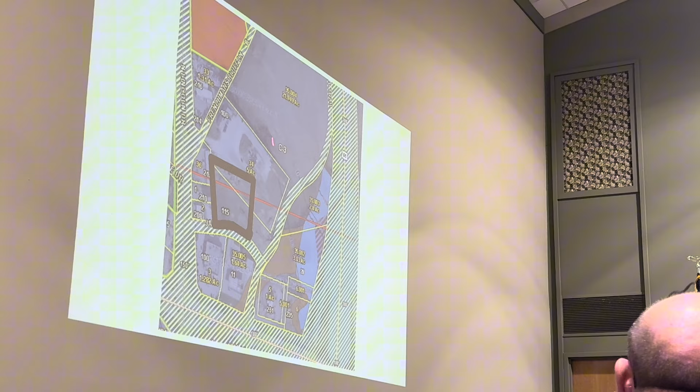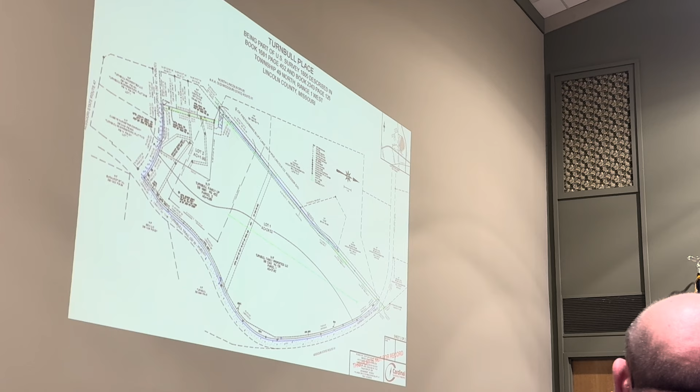Okay? It's hard to read this, and I'll try to blow it up, it's real blurry, it's hard to see. The parking requirements, they have to have at least 59. They have 70 total, including 4 handicap spaces, okay? They've got the required

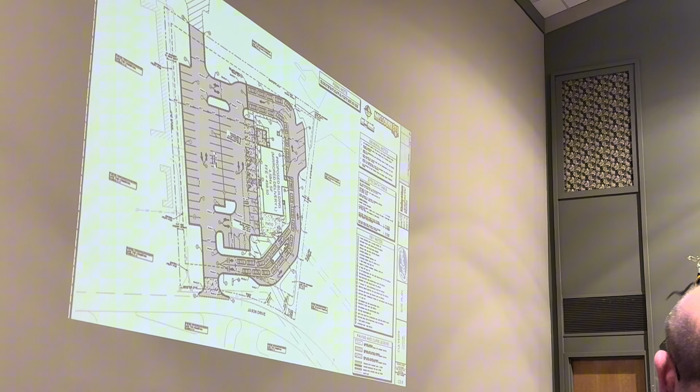This is going to be a community or regional detention basin. Let me back up here. That top corner and that bottom corner are small detention basins, okay? Then by pipes, it comes through here, it's hard to see in this, right here. There's a big box culvert, and you can see the pipes coming over. That goes into this drainage area.

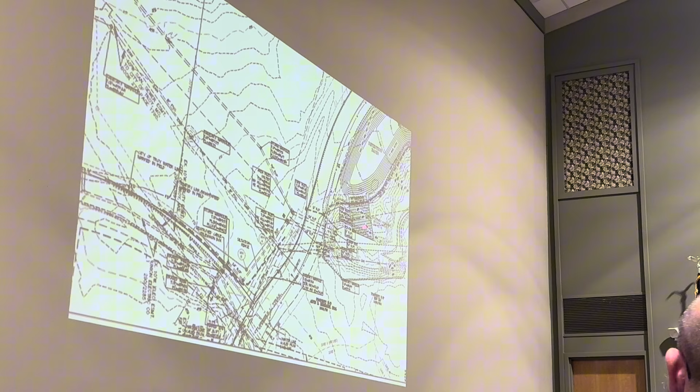Is that existing right now, or is it gonna be new? Huh? Is that existing, or is it gonna be new? New, okay, there's nothing there. That box culvert's there now. The box culvert is there, but the detention basin's not. Okay, I knew the box culvert was there, but I didn't know if the basin was there.

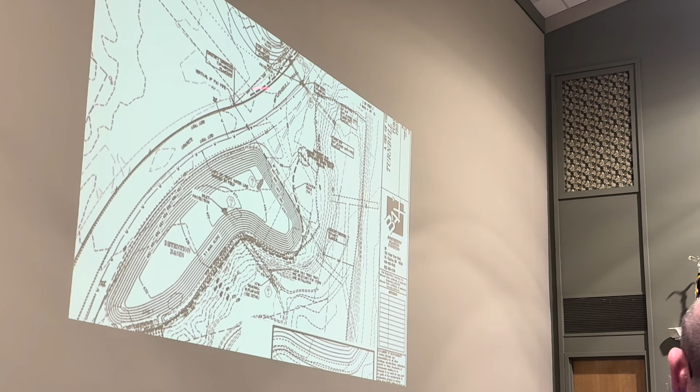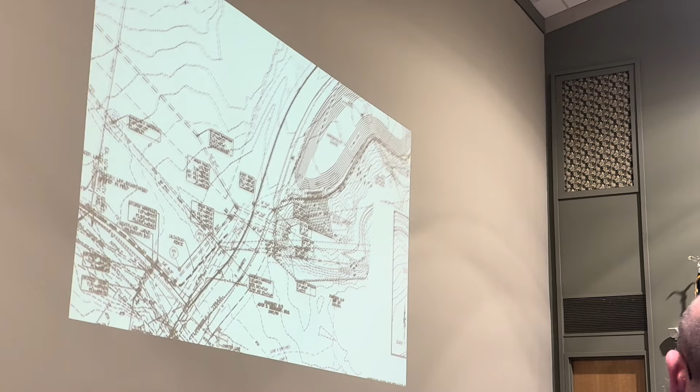Right. A rule of thumb, or the safe way to say it, you can't increase the runoff of the property, right? Y'all familiar with that term? They took a reading at this area where it leaves this property and goes under 61 across, okay? I'm just bringing it to your attention, it's probably too much information, but I want you all to understand this. To keep it at the same level or reduce it, there's so much going into that ditch, and the rest of it's being picked up by the detention. So it does not increase the runoff. You follow me so far?

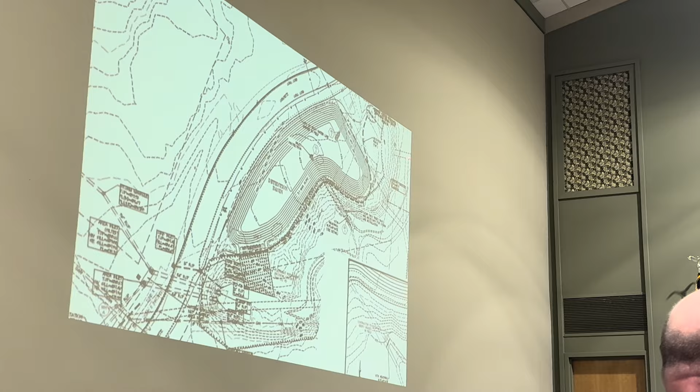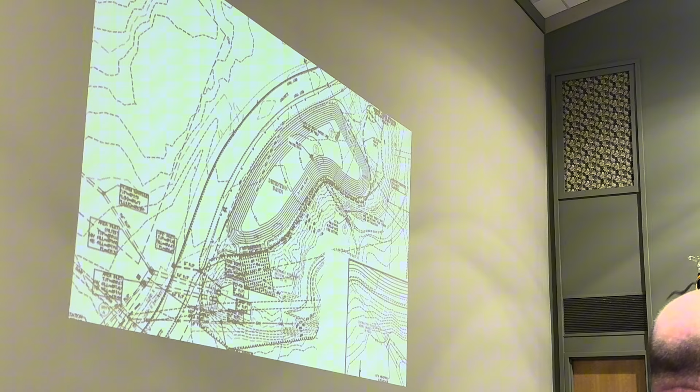Yep, keep it equal. Right, so that's why those two pipes, because as soon as we see it, we question it. Those pipes don't go technically into that detention basin. Like, whoa, we got an issue. And we have an engineer that can explain it engineering-wise, but typically you guys don't look at the infrastructure. No. But I'm letting you know what's going on. I rely on you. So that's why it's like that. That's fine.

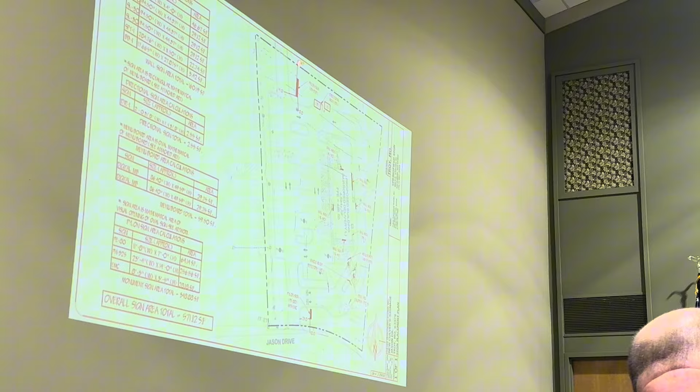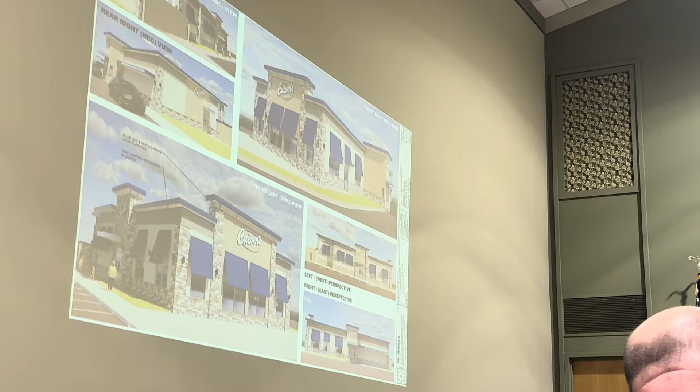Next slide. This is the site plan. It shows all their little signs on the buildings or order menus. There's a pylon sign here, a small one, and there's a tall one up here, which would be the north side of the site plan. The short pylon looks like this, it's 25 feet tall. The tall one's this way, and it's 100 foot tall, and that's what it's gonna look like. Awesome. And that's it.

Should I go ahead and say item 2 too, or should we vote on item 1 first? Do one and then two. Okay. All right, anybody else have any questions for the people that are here? Obviously, the engineer's here too. You guys got anything you wanna add? Okay, didn't mean to put you on the spot, but sometimes I get talking. No, thank you for summarizing. Okay. All right. Any discussion?

Okay. I'll entertain a motion to approve item 1 of PZ-26-0001 then. So made. How about you take the second? All right, that's gonna be a roll call vote on that. Kevin Bishop, yes. Harold Warner, Vicky Cool, yes. Wayland Martin, Margaret Avesmeyer, yes. Deanne Abelak, yes. Deborah Thurman, yes. Dan Culver, yes.

All right, item 2, Culver Horn Associates Incorporated, the applicant requests approval of a commercial site plan and conditional use permit to allow a drive-through window for a proposed Culver's restaurant to be located at 115 Jason Drive. Is that just a technicality for the drive-through on the C3? Any drive-through has to have a conditional use. Gotcha, that's what I thought. All right. Any discussion on that?

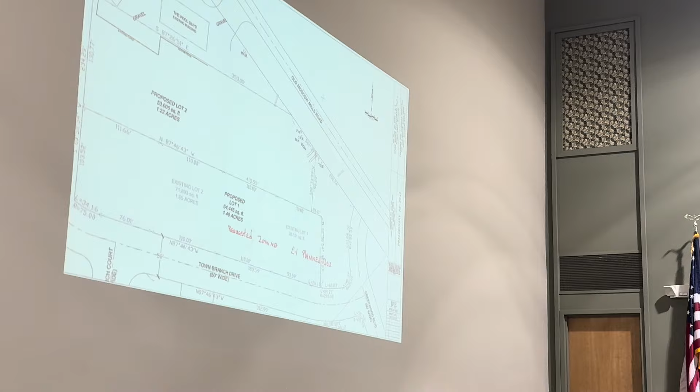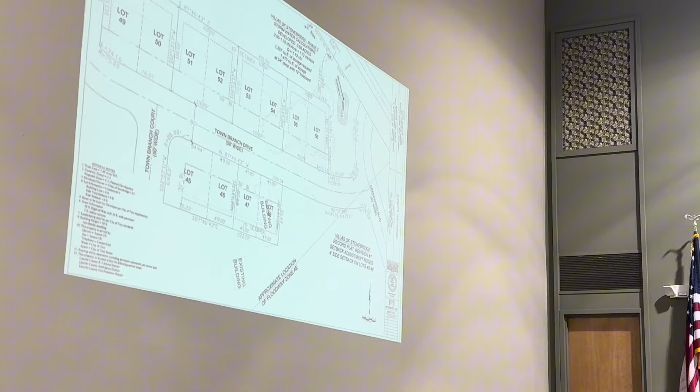This is the pool guys, I'm sorry. They're talking right now possibly a restaurant, a couple of small businesses. They'll have their own detention basin. Cannons, this is what they wanna do with their property. These two are existing lots. They wanna add 2 more on this side and those lots there to match up with what's there with the Stonebridge Villas. Is that gonna be part of your villas, Monty? Okay. That's it. Okay. All right, anybody have any questions for item 1 on that?

All right, if not, I'll entertain a motion to approve item 1 on PZ-25-0016. So moved. Is there a second? Second. Thank you. All right, roll call vote? Kevin Bishop, yes. Harold Harder, Vicky Cool, yes. Waylon Martin, Margaret Epstein, yes. Deanne Ayla, yes. Deborah Thurman, yes. Dan Cobb, yes.

All right, item 2 on that is Monty Cannon on behalf of Cannon Builders and Eddie Edmiston request approval of a rezoning request for the proposed lot 1 of Stonebridge Professional Plat 1 from C3 Highway Commercial District to C1 PD Central Business District with a planned development overlay and approval of the site plans for the proposed lots 1 and 2 of Stonebridge Professional Plat 1. And that basically is just, pool guys get the north one and Monty's gonna go on the south. Any more discussion on that? Any questions or concerns?

If not, entertain a motion for item 2. So made. I second. Roll call, please. Kevin Bishop, yes. Harold Harder, Vicky Cool, yes. Waylon Martin, Margaret Epstein, yes. Deanne Ayla, yes. Deborah Thurman, Dan Cobb, yes. All right, motion carries. Again, whoever's here for that, Monty, just Alderman meeting on the 16th, just to double check.

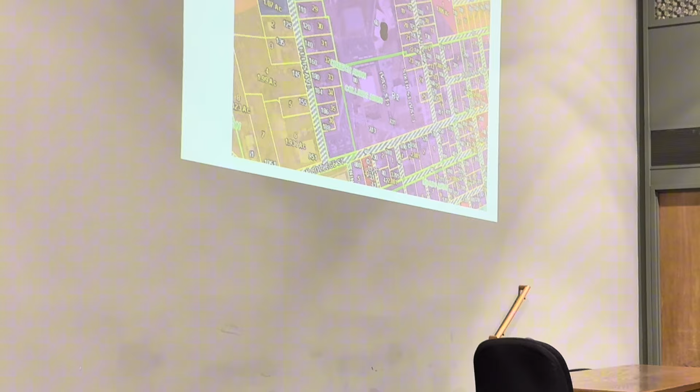All right, item C is PZ-26-0004. Bryce Gregory, on behalf of Lincoln County R3 School District, is requesting approval of a site plan for an addition on the construction trades building located at 60 Clotsfield Drive. Come on up, gentlemen. Good evening, Board. We're here on behalf of Lincoln County R3 School District, Bryce Gregory, to propose an addition to the 60 Clotsfield. My name is Brett Lovell, Austin Barton, and Ben Gifford, sorry. Don't be shy, we won't bite.

You can see our existing buildings, the left there, the hashed out part is what we want to do for an addition. We have wood shop in there. I don't know if you guys have seen the plans. We haven't seen the plans, no. Would you like to see them? So this is just tied to the existing building, tying in the back of the existing building. We started out pretty small, and we've added 3 teachers in the last 2 years. So we went from like

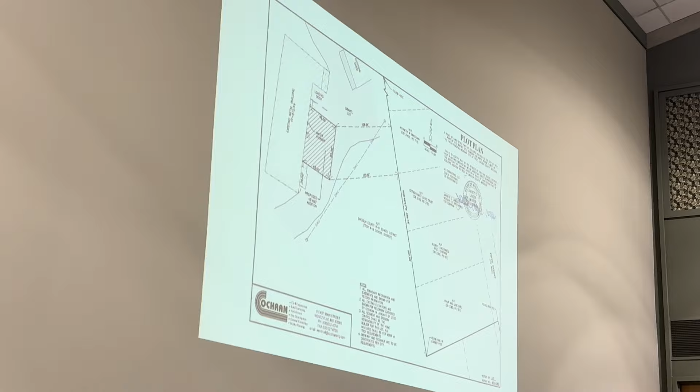This is just in our construction program. Okay, that's really cool. So we're trying to get welding in there and some other things. How big is it gonna be? 45 by 60, it's pretty big. Inside of that addition, we'll have like a plumbing wall, electrical wall, that way the kids can get their hands on before we go to our job site to work on our tech house. They kind of get that real world experience while they're under our roof at our shop.

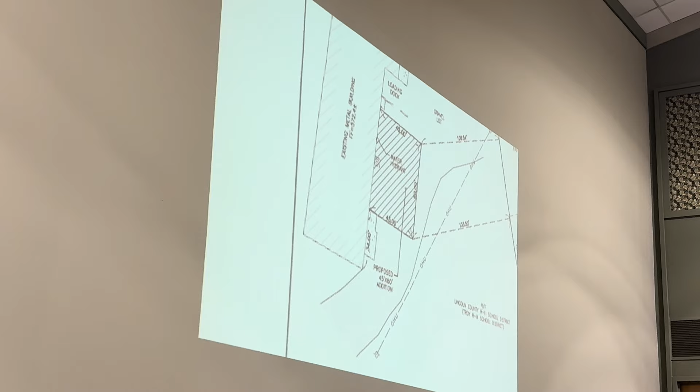Now, are you guys actually going on site and building houses with these kids now? I know that Pike Tech did that. Right now, we're building between Troy South Elementary and Troy Middle School. Yeah, I know what you're talking about, because you had like 4 lots there, at Crooked Creek or whatever it was. That's cool. It's very good for the kids. I'm glad they're interested in doing something like that. We need skilled labor people, that's for sure.

Which building is this being added to? I guess it would be to the east of the tennis courts, and south of New Horizons building, there's a building that I think used to be maintenance shop, which we've turned into construction classroom and wood shop classroom, and now we're outgrowing our existing building. We're looking for additional areas.

That's really good. So the building now, is it being used for your construction trade classes now? Yeah. I know it used to be the maintenance building at one time, wasn't it? It was, we finished out, put classrooms in, metal the inside. Just kick the maintenance guys out, just say go away. Well, up the top left hand corner, that's where they're at.

All right, anybody have any questions for these gentlemen? Any more questions? All right, if not, entertain a motion for PZ-26-0004.

Is there a second? All right, roll call vote. Kevin Bishop, yes. Harold Porter. Vicky Poole, yes. Wayland Martin. Margaret Evans, yes. Ian Edelot, yes. Deborah Thurman, yes. Dan Culver, yes. Thank you, gentlemen. Thank you. And again, you might check with the Aldermen meeting on the 16th. Okay? All right, thank you.

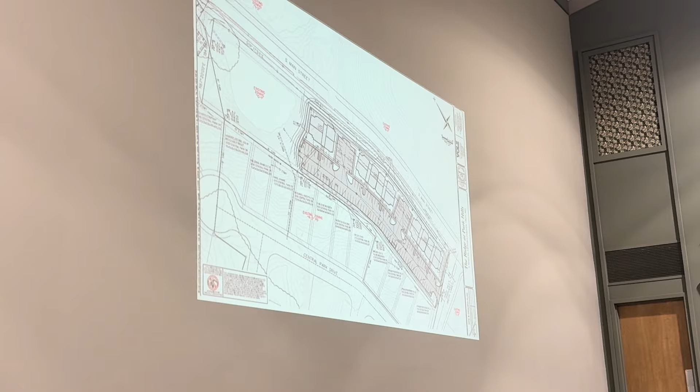I think you're pretty familiar with this site. The site is currently zoned C1, and what we're proposing is 60 multifamily units in 3 different buildings. So 60 units in 3 buildings. And I just want to say that multifamily is an allowed use in the C1, and we're not seeking rezoning, we're not seeking a CUP, we're not seeking any variances. So we're complying with the ordinances, the zoning and the subdivision ordinance with this plan.

So the site is 3.79 acres, and it's basically about 185 feet by 900 feet, so it's a long site. And on the south side, which is by the road there, it falls about 30 feet to the north. And the very end of it is where the detention basin is. It's actually an existing detention basin that's already built and is sized and will properly detain the water for this site, so there's nothing to do there. So again, there's 3 buildings. The one on the right, which would be the south end.

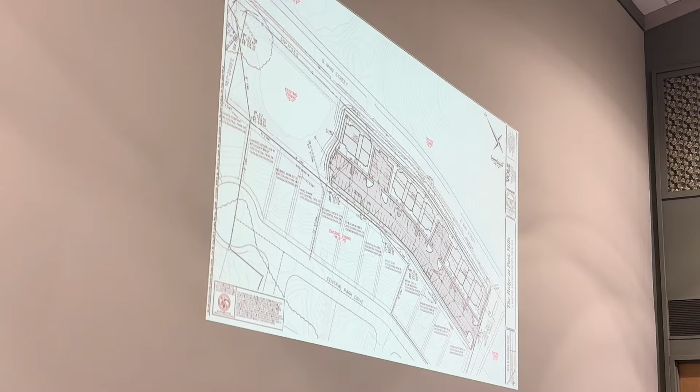Excuse me? Oh, sure. Now, your wife has flu, is that what I heard? Huh? Your wife has the flu, is that what I heard? No. Okay. Administrative assistant. Okay.

So this building right here is 24 units, the second building is 24 units, and this has 12 units. And again, it falls about 30 feet from right here to right here. The parking code that the city has actually requires 2 parking spaces per unit, so we have 120 parking spaces to match the 60 units. Parking spaces, the requirement is 10 by 20, which is actually the largest I've seen, with 5 handicap, and the drive has to be 25 feet, and this site plan meets all of that, so we have all of that in place.

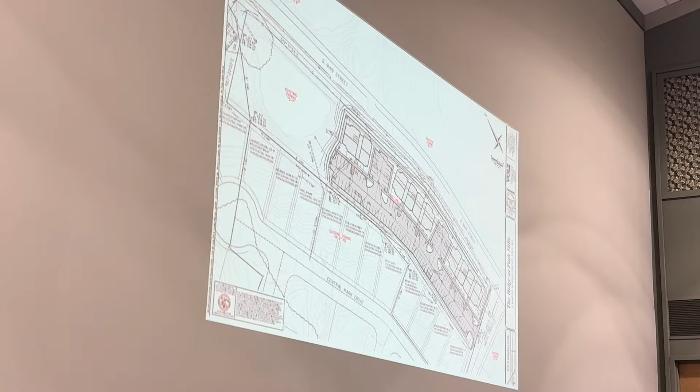Your parking and stuff. Sure, yeah, so the parking is, I think, right there. So if you go back to the site plan for me real quick, the parking lot does have lights, and there's a few light standards here, and they're gonna be diffused, so it all goes into the site and doesn't spill over here. And then we propose landscaping along this buffer right here to screen these people, and these are the green giants, which I actually have in my backyard, and they grow pretty fast and pretty tall, so they create a good screen. And with that, I just wanna say again that we think the site plan meets the C1 zoning code, and we're hoping that you approve it, and we're here to answer your questions.

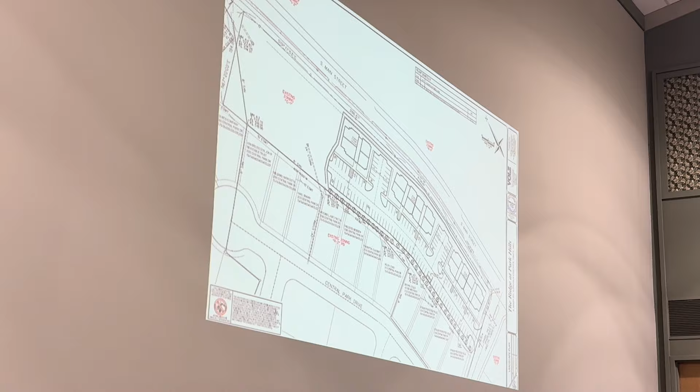You talked about the number of parking spaces. Does that allow for any guest parking? So the code is 2 spaces per unit, and that is factored into your code. Most apartment units that I do are actually like 1.8 or 1.5, so 2 should be plenty to supply these, because a lot of these are gonna be one-bedroom apartments. So 2 is generally used, and that will also provide enough parking for guests. Our parking regulation only requires 2, period. Okay. I'm just telling you, being realistic, that most apartments have 2 vehicles on their own.

Good. So most codes, though, 2 is actually on the high end of what is typical for an apartment. Well, you can't park a vehicle and a half. So generally, the requirements for most municipalities are between 1.5 and 1.8, so yours is higher. And this meets the code, and there should be plenty of parking based on your ordinance, which I'm telling you is higher than what's typical. So, you might not believe me, but it actually is.

I'm not saying I don't believe you, but I'm just saying if I were writing code, it would be more, or else there would be an allotted guest parking lot, however you want to word it. Sure. But I've lived in enough apartment buildings, I know there aren't enough parking spaces for everybody to be home at the same time. Right.

The retention basin? Sure, yeah. If it was already put in, how do you factor in that much more water going into it? Wouldn't it have to be made larger? Well, this basin was actually already sized with this being a developed piece of property. So when it was designed and built, which I didn't do, but we're going to actually have to provide those calculations, which we've done already, it already had this site in mind as being a developed site.

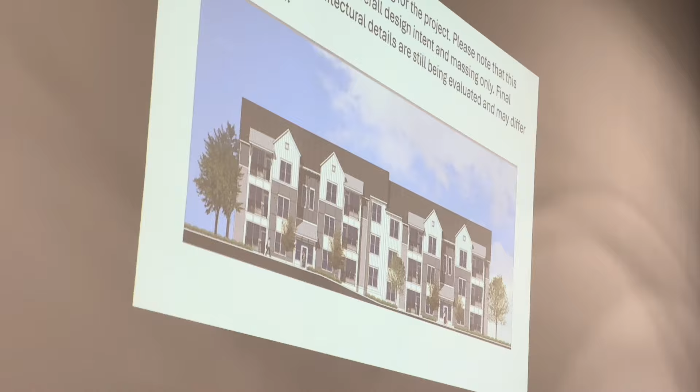Okay. I would also like to know who's going to manage these apartments. That's a question for these gentlemen right here. Yeah, because if you don't have good management, they'll be run down in no time. Sure. Well, honestly, here's the thing. I would think if they're going to spend the money, and the units look pretty nice, they're going to be pretty diligent about who they rent them to. They're going to go through criteria. Look at our houses right now, a year or two after. I understand your emotional plight, but we're just an advisory board to make sure they're conforming with the zoning. And right now, they're conforming with the zoning.

How is this going to affect our house values? Honestly, a lot of people say that. I'm in the business and I have not seen a stigma yet, unless it's a complete slumlord, that would change the value of your home. It has to be established to see whether it's going to make your values go down. You can hypothetically think it might, but until it's established and you see a problem with it, like a police presence or whatever it might be, then that'll stigmatize it. But until it's done and established, it's kind of hard to tell. Any other questions or concerns?

Yes, ma'am. I just wanted to clarify, you said if we wanted to voice concern, we should speak to the Board of Aldermen? This will be presented to the Board of Aldermen, yes. Okay. And I would suggest that you attend that. How will we be notified? Well, it'll be in the agenda. We have two aldermen right here right now. Will that be behind closed doors again? No. Because they take things back there. Well, correct me if I'm wrong, but you check to see if it's on the consent agenda, and this is probably not going to be on the consent agenda, because I would say it'd be silly to do that, honestly. It won't be in closed session.

One last question. Yes, sir. I realize you are approving the plan tonight, that makes sense, I understand it's an ordinance, as long as they're within that ordinance. Yeah, we've crossed this bridge before. But I just have a question, do you approve the builder tonight, or are you just approving the plan? We're approving the site plans on it. Okay, all right. I think you all should think twice about the builder you're allowing building in your town, the quality of homes they're building, and the way they do not stand by them.